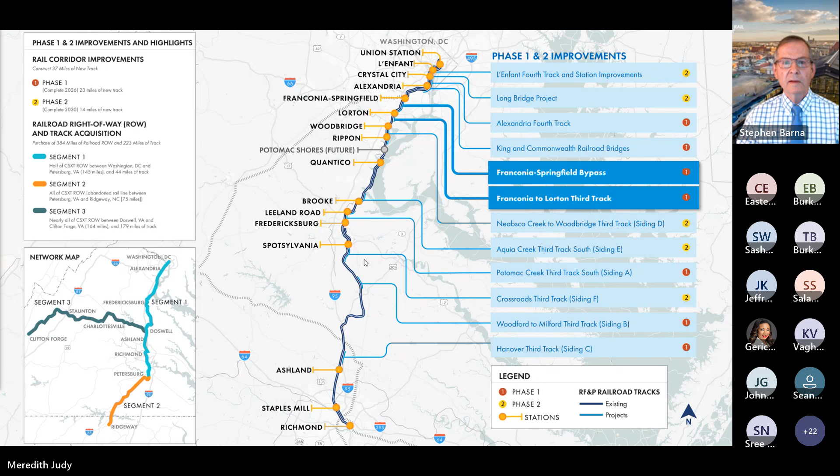This slide shows the two projects that we are talking about this evening: the Franconia-Springfield Bypass and the Franconia to Lorton Third Track.

To orient ourselves, the Beltway is at the top of the map, and the rail lines turn south to the Franconia-Springfield VRE station. Just south of the station is the bypass project, an approximately 1 mile long bridge structure, which will bring the passenger rail track up and over the two existing CSX mainline tracks from the west side to the east side. From the end of the bypass bridge, the Franconia to Lorton Third Track project will construct approximately 6 miles of new track adjacent to the CSX mainline tracks, all the way down past the Lorton and Auto Train stations. The bypass bridge and third track will be dedicated to passenger trains only. All construction will be within the existing CSX right-of-way with minimal additional property required.

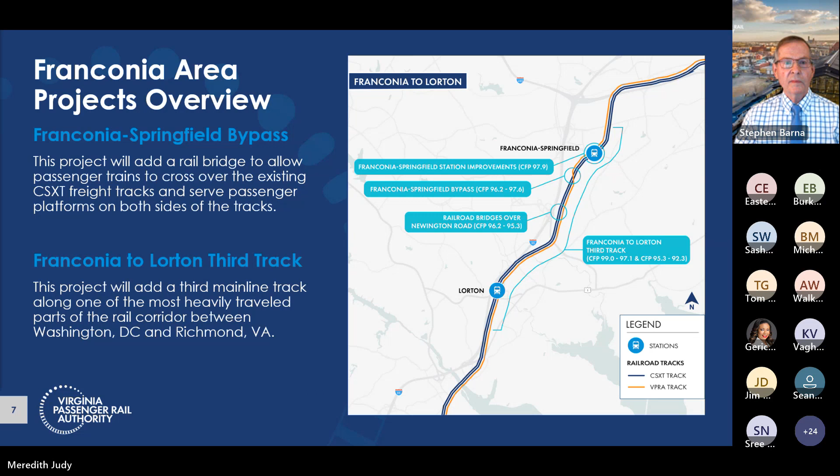This is an aerial view of the new third track beginning at the I-495 Beltway and progressing south past the Lorton stations. The Beltway is at the top of the map, and the yellow rail corridor runs north and south parallel to Interstate 95 to the left of the tracks.

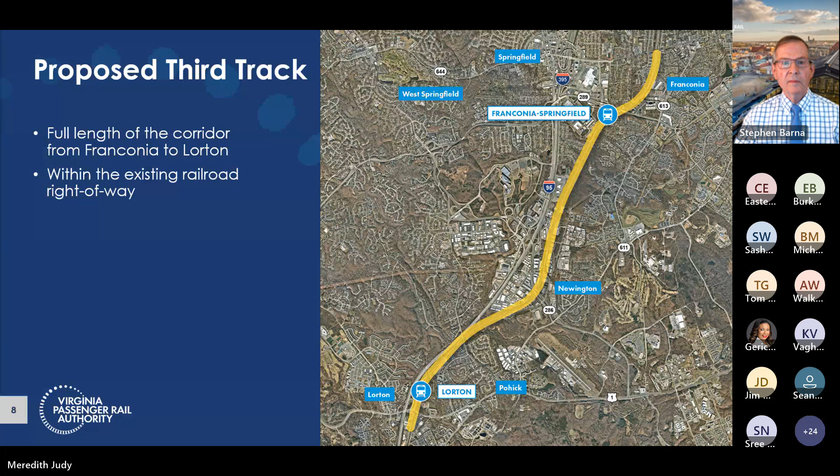This slide shows views looking south from the pedestrian bridge that crosses over the CSX mainline tracks, from the VRE station platform on the left to the metro station on the right. The picture on the left shows existing conditions today. The picture on the right shows a rendering of station improvements VRE will construct in conjunction with the VPRA rail improvements. You can see the location of the new track to the left of the new platform extension and pedestrian access tunnel VRE will be constructing. The arrow at the end of the yellow track is near the location where the bypass structure will begin.

There are 4 locations of railroad bridge improvements VPRA will be constructing for the third track. There will be new bridges at 2 stream crossings, Accotink and Pohick Creeks. Of great interest to South Fairfax residents will be the new bridge at Newington Road.

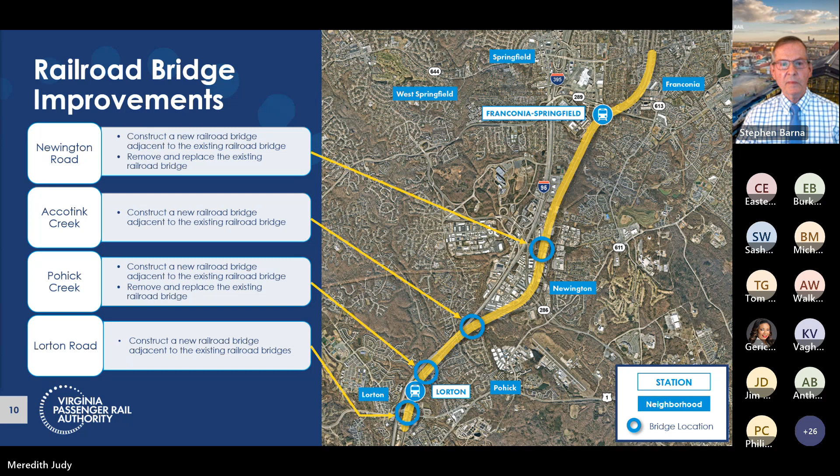Newington Road has one of the few remaining single-lane bridge underpasses. In the picture on the left, you see the existing single lane. On the right, you see a rendering of the 2 new railroad bridges VPRA will be constructing. The new bridges will take the existing 20-foot opening and create a new 90-foot opening that will be able to accommodate up to 4 lanes in a future VDOT project.

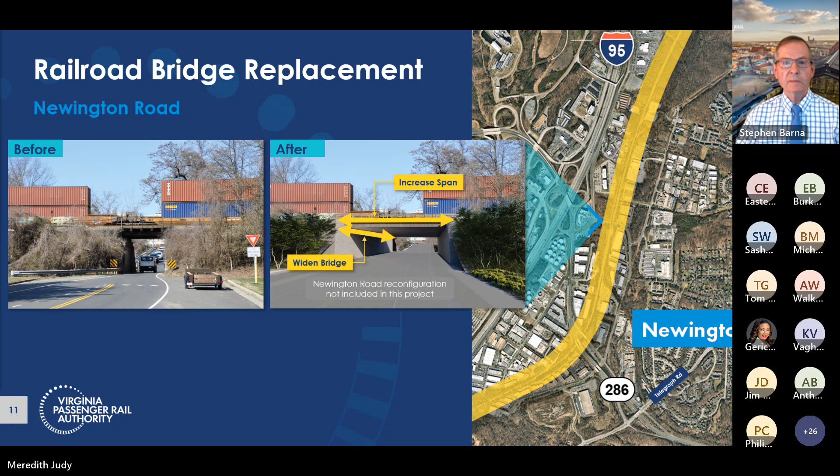The last new bridge will be at Lorton Road. At this location, a new bridge will be added to the existing bridge. The picture on the left is the existing condition looking west down Lorton Road. The picture on the right is a rendering of the new bridge and piers. The new bridge will not encroach on the existing roadway.

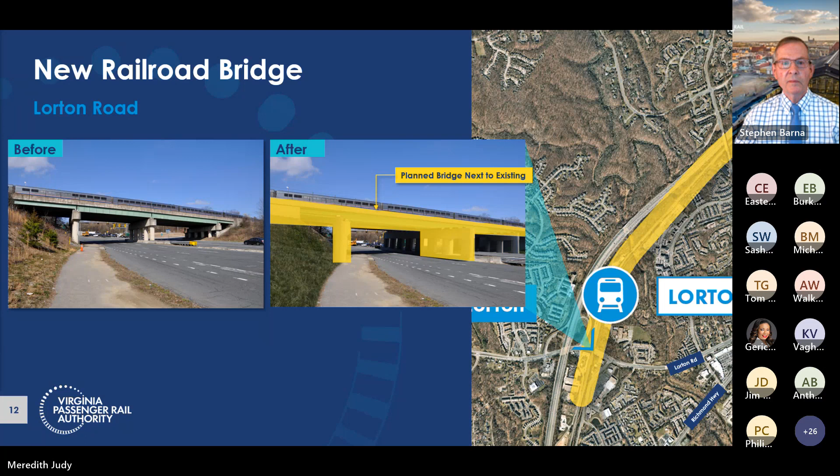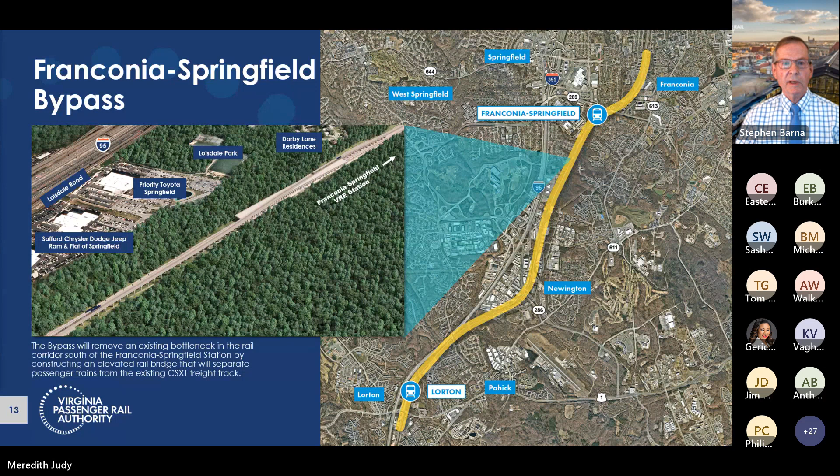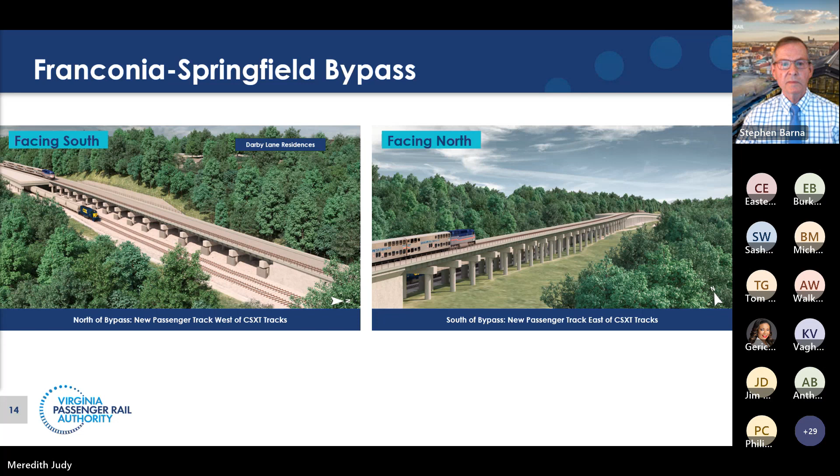What are the benefits of these projects, and indeed the Transforming Rail in Virginia program? The ability to keep freight rail and passenger rail trains separate will allow both Amtrak and VRE to increase passenger service to and through our region by increasing the number of trains and reducing wait times. Not having freight and passenger trains share the same tracks will improve the reliability of service and the ability to better connect passengers to bus and metro rail service.